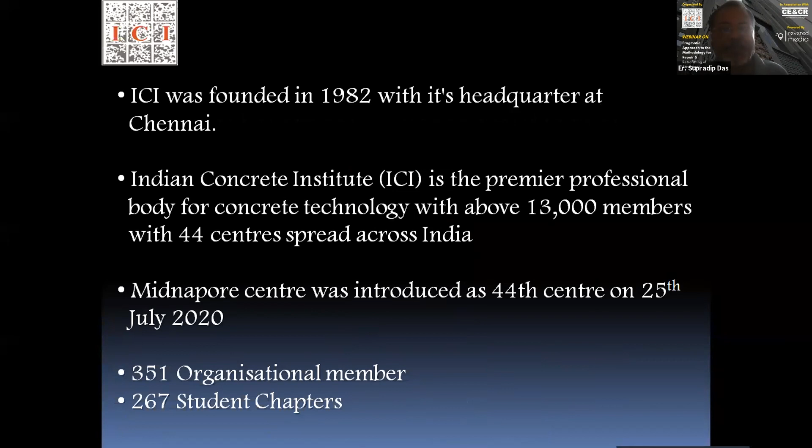So, Indian Concrete Institute is one of the premier professional bodies on cement, concrete and construction technology. We have a new website, www.indianconcreteinstitute.org. As already informed by Rajiv ji, it was founded in 1982 with its headquarters at Chennai. ICI has around 13,000 members at 44 centers spread across India. We have around 351 organizational members and 267 student chapters.

Objectives of ICI are to promote growth of concrete construction and its specialization, to disseminate knowledge and information for needs of changing concepts, to train personnel, collaborate with national and international agencies, create a better understanding between cement and concrete construction technology, to identify R&D issues, outstanding achievement in concrete construction technology through

institutions. We also collaborate with national and international agencies like ACI, Asian Concrete Federation, Singapore Concrete Institute, Concrete Institute of Australia, distribute awards for achievement in concrete construction technology, and arrange lectures on selected topics of relevance to concrete construction. ICI also organizes periodical seminars, conferences, workshops and exhibitions on the subject.

ICI publishes quarterly journals containing peer-reviewed technical papers and technical abstracts from 40 journals. ICI has also brought out a number of publications and monographs on various related topics. Advisory service: ICI offers an industry advisory service for problem solving in design, construction, maintenance, and repair.

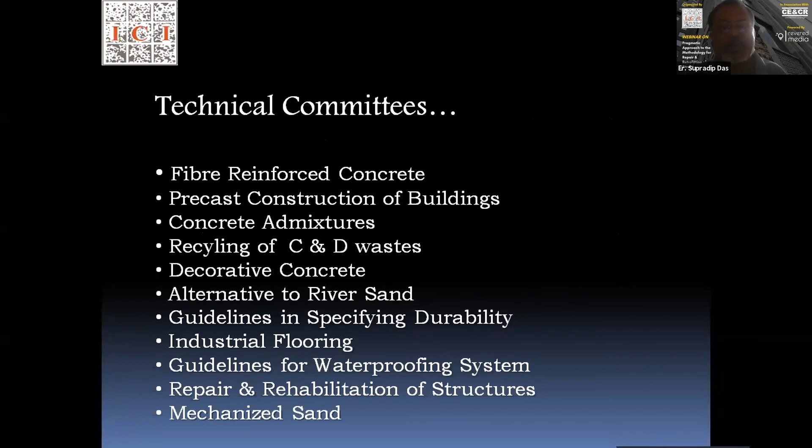We also have around 11 technical committees. They deal with various issues related to cement and concrete, like fiber reinforced concrete, recycling of C&D waste, decorative concrete, river sand, guidelines in specifying durability, industrial flooring, repair and rehabilitation of structures, and mechanized sand. Through these technical committees, we have come out with around 10 technical publications. Their hard copies are available with us. You can download them from our website, or check with the state chairman, secretary, or vice president for a hard copy.

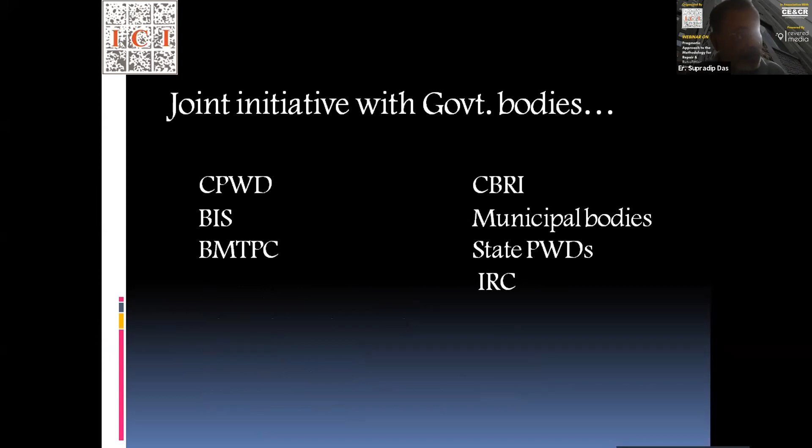We have joint initiatives with government bodies: CPWD, BIS, BMTPC, CBRI, municipal bodies, state PWDs, IRC. We also have headquarter awards, that is annual awards, lifetime achievement awards for each zone, outstanding concrete technologist, innovative application of special concrete, Dr. Ramakrishna award for best project with precast concrete in India, outstanding pre-stressed concrete structure, and young scientist award.

We also have two branded events: ACCon, which is held every 4 years, and IWC, held every 5 years. They are two international events and a unique platform for experts to participate and share their experience and knowledge. In 2020 we were supposed to organize ACCon, but due to the pandemic it has been postponed to 2021, and hopefully in December this year or March next year we will celebrate ACCon 2020.

Concrete Day is a very important event for ICI. It is organized on 7th September every year, and all the centers celebrate. This is the day ICI was formed. Then we have student chapters. Any institution having more than 50 students can have a student chapter. We have around 267 student chapters. Next.

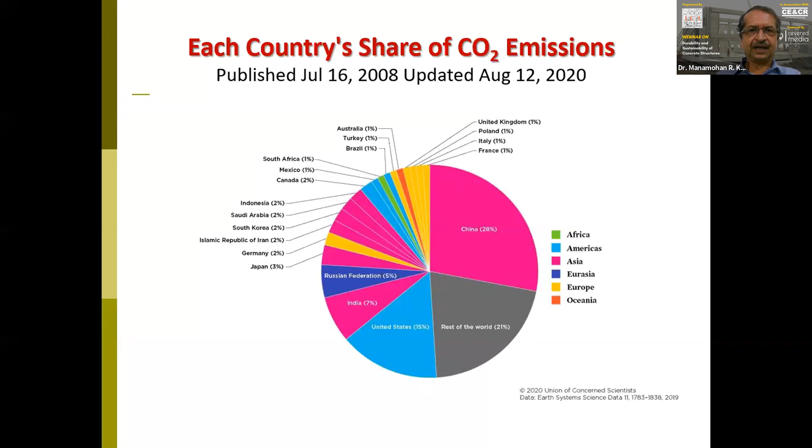Now, everybody is talking about carbon dioxide emissions and the pollution that's being created all over the world. And this is one such pie chart. You will find hundreds of them on the internet. This is updated August 12th, 2020, hence I have chosen this. So you will see here that the majority of the carbon dioxide emissions is from China, followed closely by the United States. And the rest of the world is 21%. But if you look country-wise, after China and the United States, it is India.

Although it's not as alarming as that of China and USA, the picture appears very grim in India because we are planning to have very large growth in the next decade or so. And obviously, along with the development, the carbon dioxide emissions or the pollution potential is likely to go up very high. And hence, we need to be concerned. We are also a part of an agreement to reduce carbon dioxide emissions worldwide. We'll come to that a little later.

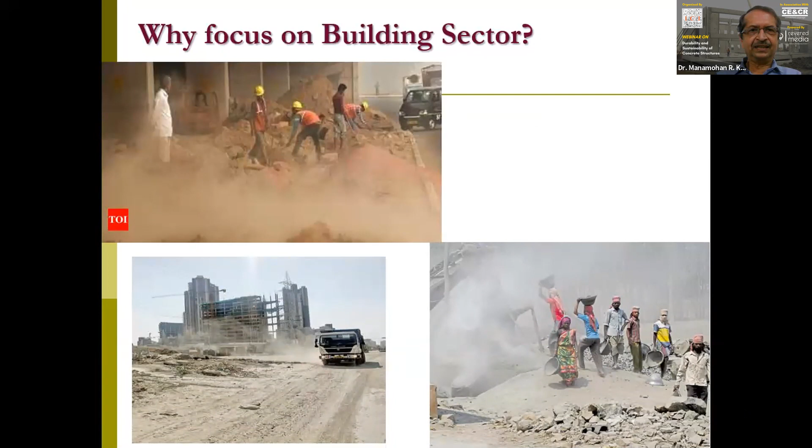So why the building sector? It is obvious; anybody who's been to a building site has seen this kind of environment. Other than the dust that you see around in construction, we also see that the building sector is the single largest contributor to global GHG, with approximately 1/3 of global energy end use taking place within buildings. The construction sector is said to be responsible for more than 1/3 of global resource consumption, including 12% of all freshwater use, and significantly contributes to the generation of solid waste, estimated at about 40% of the total volume.

And hence, building sector is central to any attempt to use resources more efficiently. And hence, the government of India is also seized of this challenge that we are facing in upkeeping the promise that we have made to the world bodies in terms of reduction in pollution.

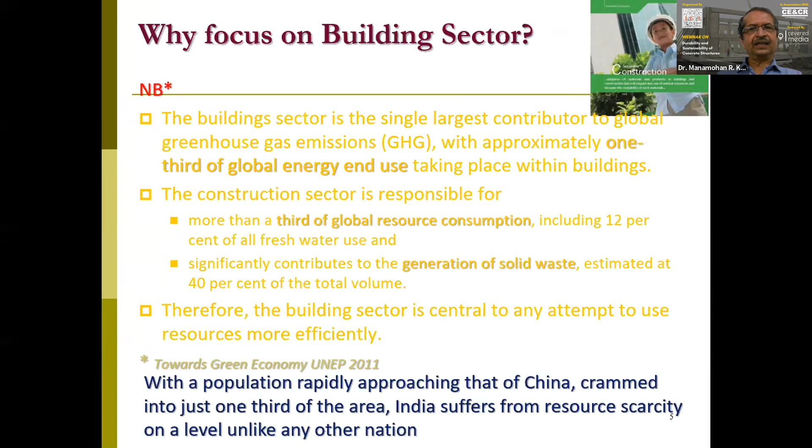So, with a population rapidly approaching that of China, and we are crammed into just 1/3 of that area of China, India then suffers from resource scarcity on a level unlike any other nation. So we should be concerned about the resource depletion as well.

So people talk of green construction, but green construction is not just about building materials only, but there is a lot of it which is connected to the entire conceptualization to construction to maintenance and so on of the buildings and infrastructure. So the general principles of sustainable construction have 4 tenets, which are reducing the energy in use. That is, when the building or the project, this structure is in use, the amount of energy that is consumed, how do we reduce that is one of the primary goals of sustainable construction.

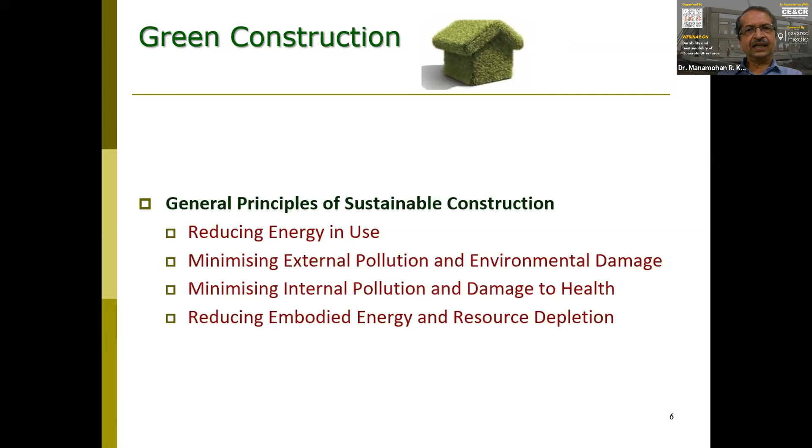Minimizing the external pollution and environmental damage is the next target. The third target is minimizing internal pollution and damage to occupants' health, and also reducing the embodied energy and resources depletion. So we generally as civil engineers right now talk of the first and the last targets that are there. The rest of it, of course, is a matter of how we use the building, how we plan and maintain the building.

So for a building to be sustainable, if you consider the entire life cycle of the building, they consume resources that far exceed the ones associated with the original construction. Yes, we do consume a considerable amount of energy and cause environmental pollution, but if you look at the entire life cycle, the energy that is required in operation and in maintenance is likely to consume a lot of resources.

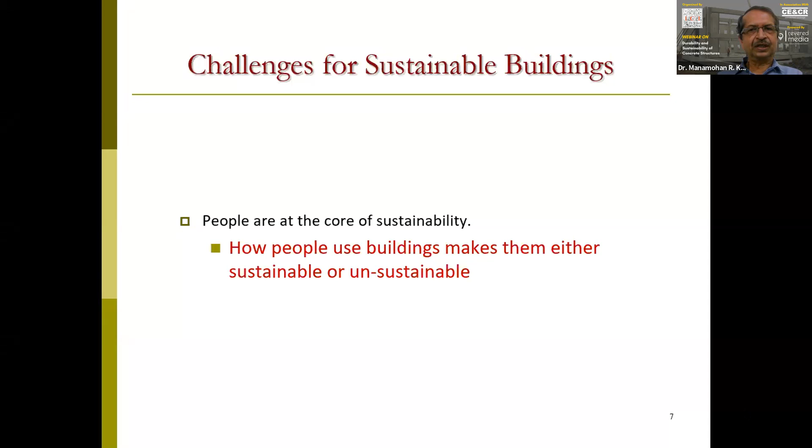And we should remember that people are at the core of sustainability, and how people use these buildings makes them either sustainable or unsustainable. I have seen people who put on their air conditioners and keep their doors and windows open, which means you're trying to cool the entire world, which is against the tenets of sustainability. Hence, it's important to educate people as to how they should use the facilities and appurtenances that are there in their buildings, so that we have a sustainable building to use.

So the challenge is to study the people-focused systems and derive the models and theories that explain and describe these systems, and identify solutions which would reduce any adverse effects of buildings on the environment. This is being tackled jointly by the architects and the engineers together to make sure that the entire impact is much minimal. So the solutions will most likely involve innovative technology for new and improved products and also processes.

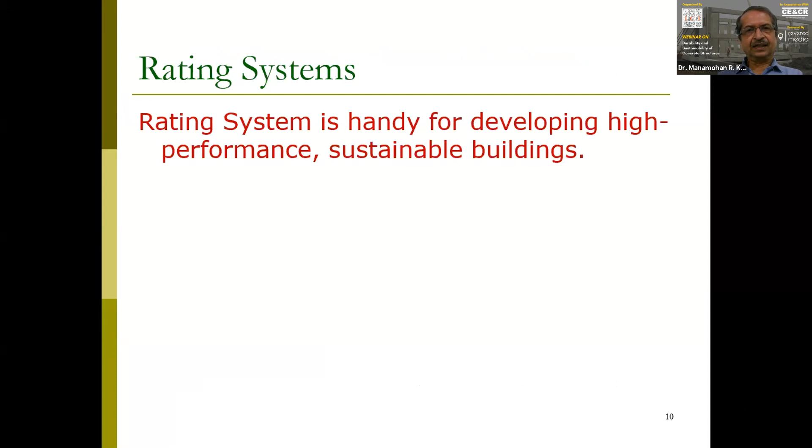There are several rating systems which are becoming popular now. Of course, they are not the ultimate, but at least they become very handy in following certain basic rules and making sure that the buildings are planned, constructed and maintained as per the tenets of sustainable buildings. So the leading ones are the ones from the USGBC or IGBC called the LEED Green Building Rating System. And we also have GRIHA, which is developed by TERI along with the Ministry of New and Renewable Energy, Government of India. There are many more world over, and the basic principles are the same, but they come very handy in at least managing the situation.

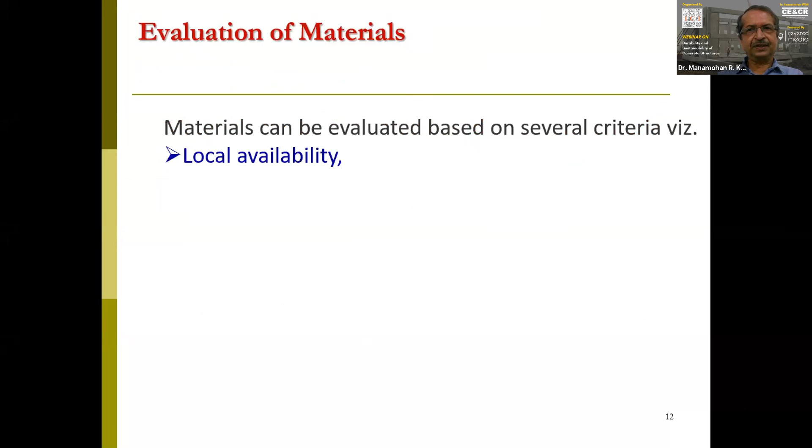Now, when we talk specifically about evaluating materials, there are several aspects that one considers for evaluating the materials that we use in construction. So these are like local availability, embodied energy, percentage of recycled waste materials within that building material, rapid renewability, recyclability, durability, contributions to energy efficiency of buildings, and other environmental impacts.

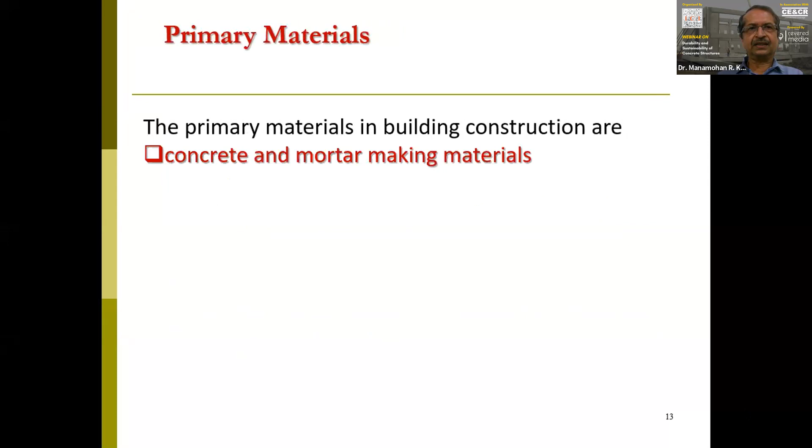So the primary materials that we normally consider in building construction are the concrete and mortar making materials, which consume a very large amount of volume as well as energy. And these can be subdivided into aggregates, fine aggregates or coarse aggregates, and cements. Also, another major part of the building is the walling material, which could consist of clay bricks or concrete blocks, solid or hollow, or presently even AAC blocks.

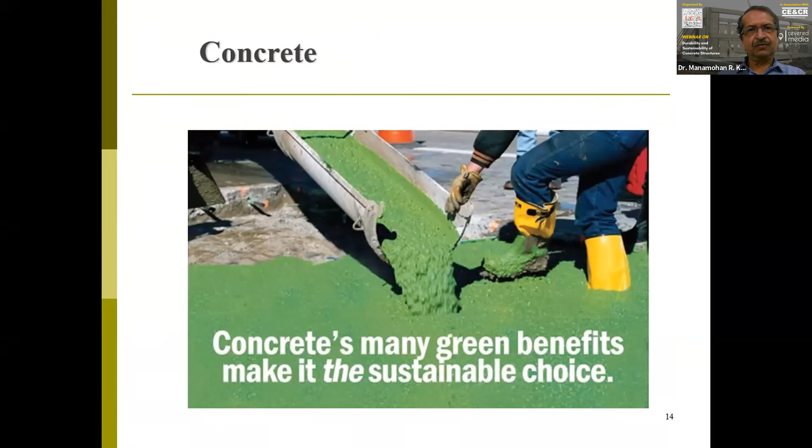Now, coming closer to our topic, which is concrete, it's not the color that you should look at, but the green benefits that we have in using concrete. When you consider the entire life cycle of concrete, it is said to be the sustainable choice for construction. When you look at the entire life cycle, where we consider the extraction, processing, construction, operation, demolition, and recycling of the material that you are using for construction, concrete makes a significant contribution to the triple bottom line of sustainable development.

But then we are not stopping at saying that concrete is the most sustainable amongst what is available; we want to see how to make it more sustainable. So what are the choices that we have? The choices that we have are to make cement more sustainable, because that is the most polluting material within concrete. So how do we try and make cement more sustainable?

It's by using less energy intensive kilns during manufacture, and using supplementary cementitious materials so that we reduce the clinker component or the OPC component, because the saying people normally use, that 1 ton of cement production produces 1 ton of carbon dioxide footprint, is basically for the production of the clinker, that is the OPC.

So if we use supplementary cementitious material, we reduce the clinker content. Suppose you are using fly ash at 35%, you are reducing the clinker content by 35%. And if you are using slag upwards of 50%, you will be reducing the clinker content to less than 50%, so it will be 40% or 45% or whatever. And by using this supplementary cementitious material, you also make sure that you make a better concrete than it would have been with a pure clinker-oriented or OPC cement.

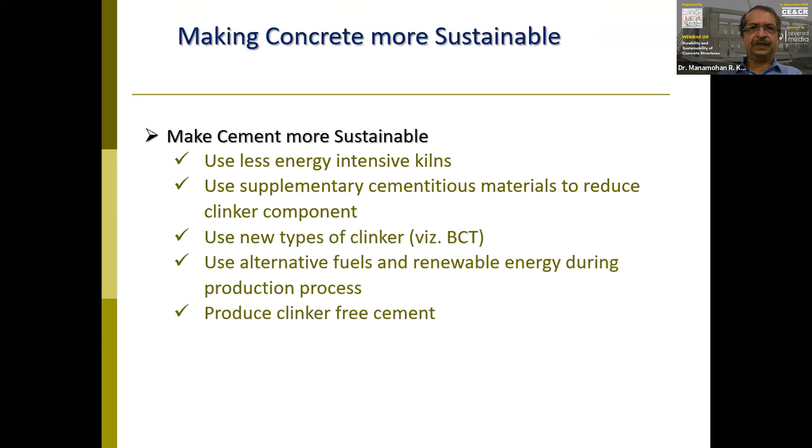We also try to use new types of clinker, and we use alternative fuels and renewable energy during the production process. And we also try to produce clinker-free cement. Now people are talking of geopolymers, which is a very promising material. So that is clinker-free. What I mean by clinker is this OPC clinker. So these could be the alternatives to make the cement more sustainable.

There is also a possibility to make the concrete sustainable with alternative materials. Of course, supplementary cementitious materials are also a part of the alternative materials. But if you look at aggregates, you can use recycled aggregates or secondary aggregates, which is a big topic by itself today. We can use wastes, trying to convert liabilities into assets: wastes as reinforcement, wastes as special additives, and so on.

We can try to make concrete more durable. The longer the building lasts, the lesser is the demand on reconstruction or rebuilding, and again resource depletion, pollution, and so on. So durability happens to be a subset of sustainability. That's why I thought it better to deal with durability as a subset of sustainability and focus more on sustainability. So these are some of the alternatives to make the concrete more sustainable.

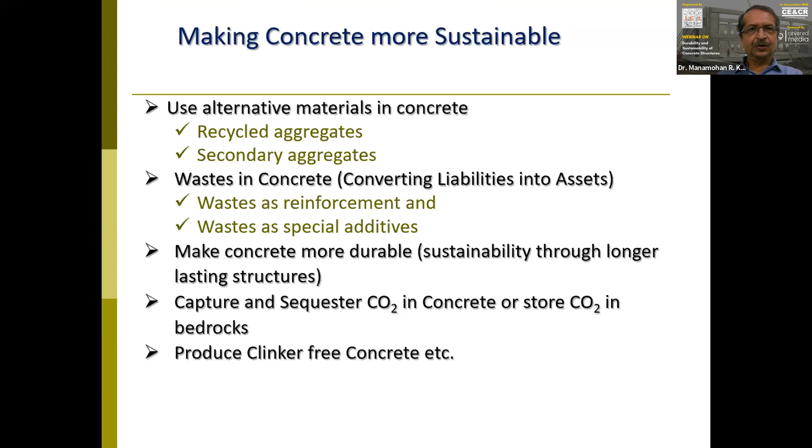In addition to that, efforts are now on to capture carbon dioxide in cement manufacture or any other industry, and sequester it in the concrete, or sequester the carbon dioxide in the bedrocks and so on. There is also effort to produce clinker-free concrete, like geopolymer concrete. There are two terms, geopolymer cement and geopolymer concrete, so this appears in both places.

So if we are planning to use any alternate material, we have to go systematically, analyze, and find out what benefits accrue from the use of these alternate sources. That involves the characterization of materials. Any material that you choose as an alternative to present conventional materials of concrete, you have to subject to physical and chemical characterization, and also study concrete made with these alternative materials, in the fresh state and hardened state, to see what the benefits are, what the difficulties are, what the challenges are, how to overcome them, and so on.

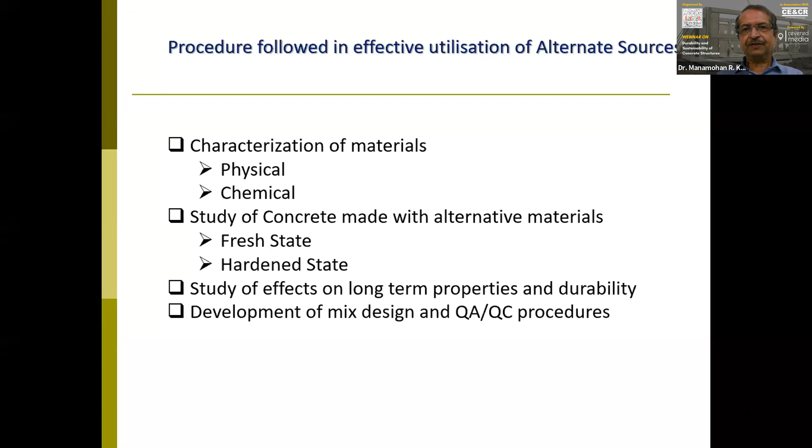And the third thing is to study the effects of this concrete with alternative materials on the long-term properties and durability. So again, durability becomes a parameter for consideration here also. And once you approve and select materials, you also have to give the field the appropriate mix design and QA/QC procedures, which might be different from what people are accustomed to with conventional materials.

Now, if you look at cement and how to reduce carbon dioxide by more than 1 billion tons per year by 2050, which is a target that cement companies have set for themselves, there are several groups who are working to see how this can be achieved.

Now, there is an association called Global Cement and Concrete Association, which all of you must have heard. This is a consortium of 40 of the world's leading cement and concrete companies.

And from 2020, they have started their efforts to make sure that we achieve our goals for reducing the carbon dioxide footprint. So the ambition statement that they have released demonstrates the commitment of the industry across the globe to drive down the carbon dioxide footprint of concrete, which is the world's most used man-made product, with an aspiration to deliver society with carbon neutral concrete by 2050. Carbon neutral concrete by 2050.

So the statement which GCCA has released identifies the essential levers that will be required to achieve carbon neutral concrete, including reducing and eliminating energy-related emissions, reducing process emissions through new technologies, and deployment of carbon capture, more efficient use of concrete, reuse and recycling of concrete and buildings, and harnessing concrete's ability to absorb and store carbon from the atmosphere. The concrete itself acting as a carbon sink.

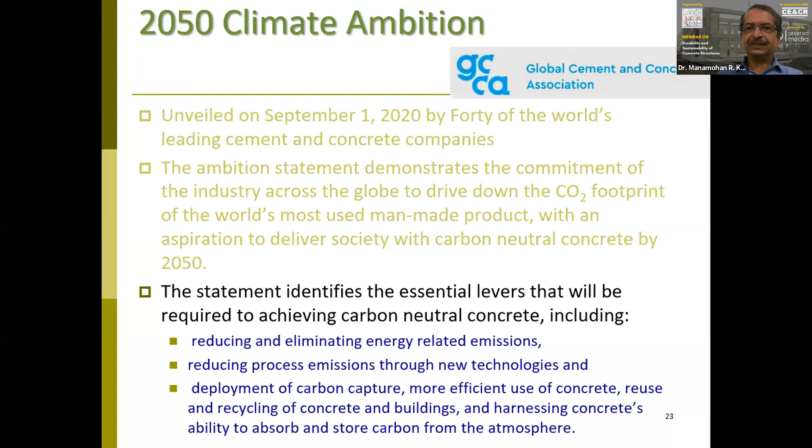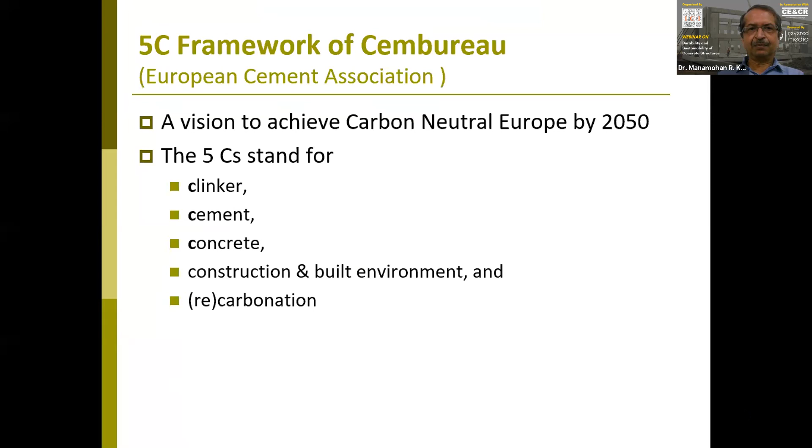There is also another effort in Europe, which is from the CEMBureau, the European Cement Association. They have been working with the same vision to achieve a carbon neutral Europe by 2050. They have put themselves what is called the 5C framework, which is clinker, cement, concrete, construction and built environment, and recarbonation. So these are the 5 C's that they are planning about.

So they are hoping that from the 2017 emission levels, they can reduce the kg carbon dioxide per ton of cement from 667 kgs to 227 kgs of carbon dioxide per ton of cement by optimizing various aspects, that is decarbonated raw materials, biomass, thermal efficiency, new cements, and then the fuel and electrification effects, and also try to access the various innovations which are in the pipeline right now, and also access renewable electricity, high carbon dioxide price parity that is likely to come in the future, and so on. So this is the first C that they are tackling.

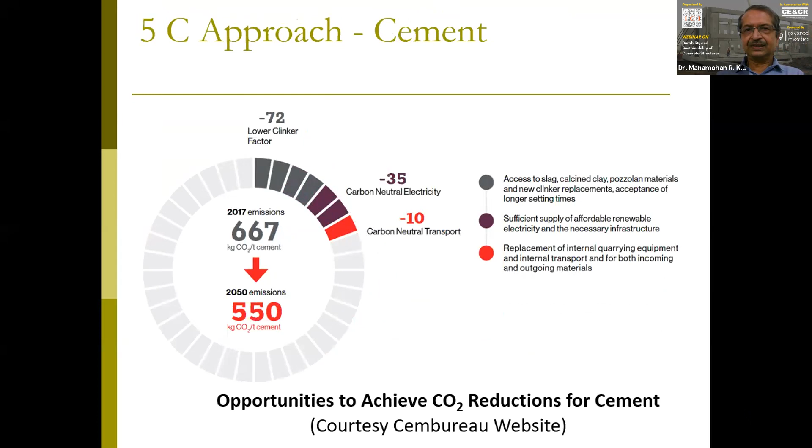The second C, about cement, they want to reduce from 667 to 550 by looking at lower clinker factor, carbon neutral electricity, and carbon neutral transport. And in concrete, they want to look at improved concrete mix design, carbon neutral transport again, and reduce the kg of carbon dioxide per ton of cement from 667 to 608.

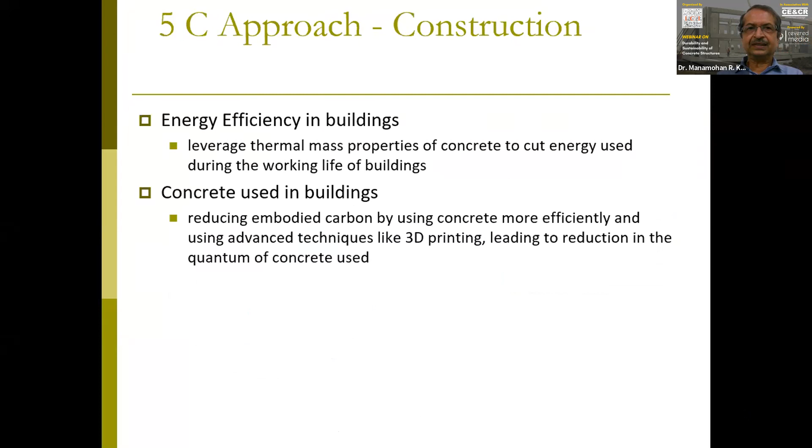Then construction, where they are looking at leveraging thermal mass properties to cut energy used during the service life of the buildings, and the reduction in the embodied carbon in the concrete used in the buildings by using advanced techniques like 3D printing, leading to reduction in the quantum of concrete used itself, and also using concrete structures' adaptability for mixed use in buildings,

as well as design for deconstruction. This design for deconstruction is an interesting phenomenon where a building is conceived at the origin itself with the objective to disassemble at the end of life. This approach will allow materials and components to be removed easily and reused to construct new buildings, which means we are planning for disassembly as well as adaptability for mixed use as a method for reducing the carbon footprint.

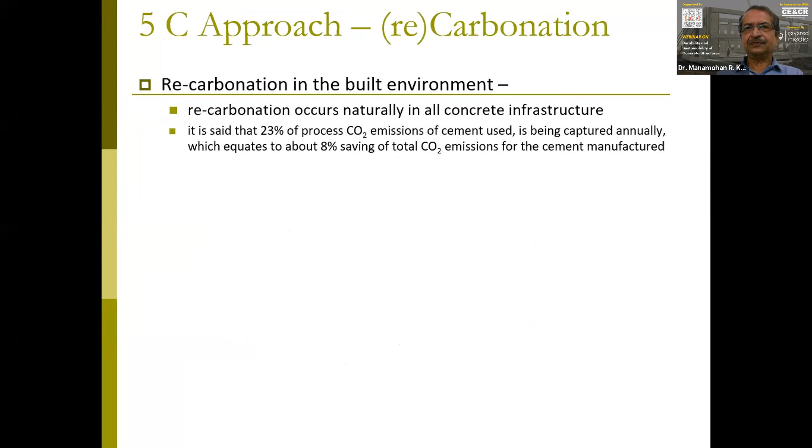And recarbonation is basically using a natural phenomenon where concrete has a tendency to absorb carbon dioxide from the atmosphere. So it is said that 23% of carbon dioxide emissions of cement used is being captured annually, which means about 8% of savings of carbon dioxide is automatically happening. So this they want to consider, and enhanced recarbonation of recycled concrete.

That is, when you are breaking the concrete for utilization again as a recycled material, they want to accelerate the absorption of carbon dioxide by these recycled materials by pumping in exhaust gases from the cement kiln or any other captured carbon, so that 50% of carbon dioxide can be absorbed. The more you break them down, the greater the capacity to get carbonated by absorbing carbon dioxide. So these are the efforts that they are looking at.

And also they are looking at using natural minerals to recarbonate by exposing them to air and kiln exhaust gases and using that as clinker substitutes. So the overall effect of this 5C is to bring down 783 kgs of carbon dioxide per ton, which was the value at 1990 levels. It is not 1 ton of carbon dioxide for 1 ton of cement.

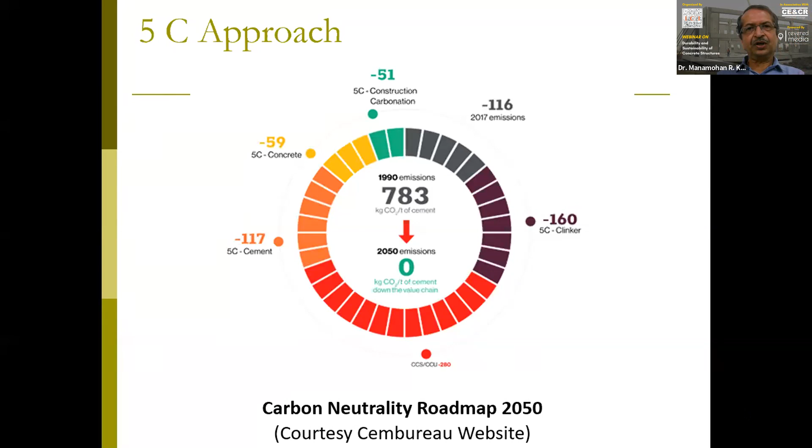It had already come down to 0.78 tons. From that 0.78 tons, by 2050, they want to bring it to 0. So this is the roadmap, that carbon neutrality roadmap that people are working on. Of course, GCCA or Cembureau, whoever it is, there is a roadmap on which people are working. They are modifying this. A lot of surveys are being considered. A lot of engagement with the government is going on in various countries to make sure that concrete becomes carbon neutral.

So worldwide, several hundreds of companies and research groups are working to keep carbon dioxide out of the atmosphere and store it someplace else, including deep geological formations, as I mentioned, in bedrocks, soils, soda bubbles, and concrete blocks, and so on. And by making waste carbon dioxide into something marketable, entrepreneurs can now begin raising revenues needed to scale their technologies.

There's an interesting competition organized by NRG and COSIA Carbon. This is called the Carbon XPRIZE, and this is a challenge where $20 million is the prize for giving the technology which is the best as far as carbon dioxide reduction is concerned. So this year the winners were two.

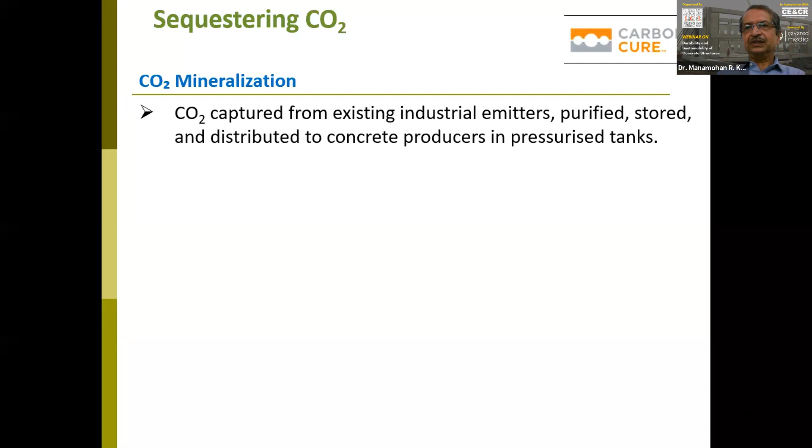CarbonCure is one company which has already successfully implemented carbon dioxide mineralization. That is, carbon dioxide captured from industrial emitters is purified and delivered in pressurized stainless steel tanks to the RMC producers. And the liquid carbon dioxide is injected into the wet concrete mix at the time of manufacture of the concrete itself. You can see the cylinder there, introduced in one of the RMCs.

And this carbon dioxide in the fresh state of concrete reacts with the calcium ions from cement to form nano-sized minerals of calcium carbonate, which get embedded in the concrete, which results in stronger concrete and mix optimization, giving you a reduction in cement consumption, and also the consumption of carbon dioxide. So the technology can be retrofitted into an existing concrete plant. That's the advantage of this prize-winning technology by the company called CarbonCure.

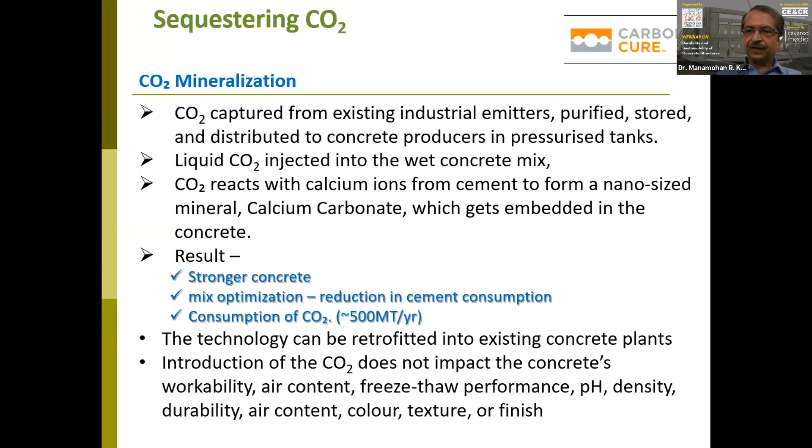And the introduction of carbon dioxide does not impact the concrete's workability, air content, freeze-thaw performance, or pH, because that's a question that everybody raises, that if calcium carbonate is being formed, pH is going to reduce. No, the mechanism is different. And durability, air content, color, texture, or finish, none of them get affected, but you get a lot of benefits.

The other prize winner in that contest was from the University of California, Los Angeles, led by an Indian, Gaurav Sant, and they have come out with what is known as CarbonBuilt as a company now. Their process locks the flue gas carbon dioxide into limestone with what they call CO2 concrete. This requires very minimal capex, a simple stack tap integration with limited site utility tie-ins. It does not require any carbon capture system, and readily integrates into the existing construction supply chain.

Basically, it's very useful for precast applications, and it's already successfully implemented in some plants which are manufacturing concrete blocks and so on. These mixtures can incorporate low-value fly ashes, which is a great advantage, including those reclaimed from landfills and pond ash and so on, without compromising on the engineering performance of the equivalent concrete.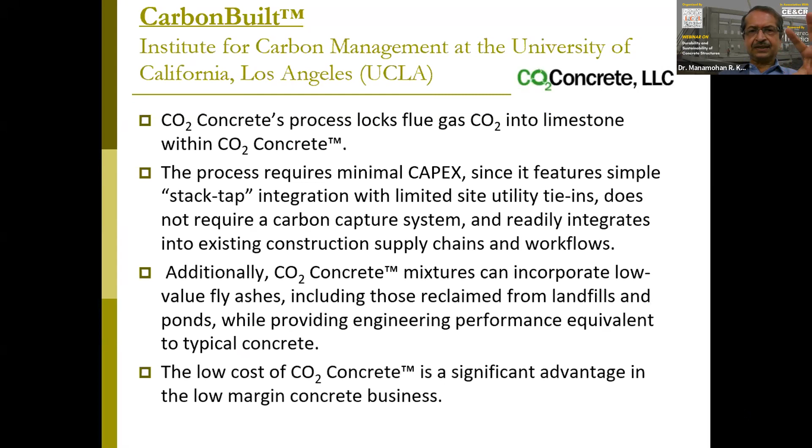So this is a significant advantage with this particular method, which they are now calling CarbonBuilt's Reversa technology. This is the technology that is likely to become very popular, along with, of course, CarbonCure, which is also a technology that is likely to grow very fast even within our country. This modular technology can be added to any site to permanently embed flue gas carbon dioxide into masonry or precast concrete produced nearby.

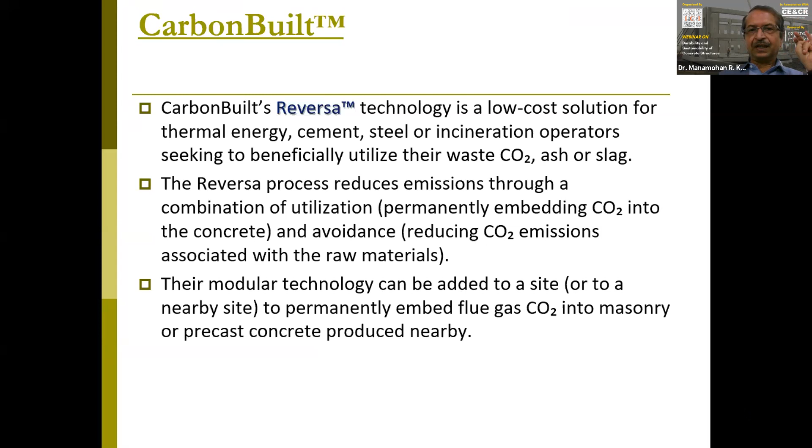Okay, there are a few projects I just want to quickly go through. There is a Swedish project which includes studies of calcination and clinker mineral formation for carbonate-based raw materials. All of them are looking at something allied to this particular issue. They're using electrical heating as one of the technologies, carbonation under cooling in high carbon dioxide concentrations, evaluation of technologies aiming at upscaling, and determination of gas composition of CO2-rich process gases. So the suitability of these gases for transport and geological storage will be evaluated. This is just a project which has started.

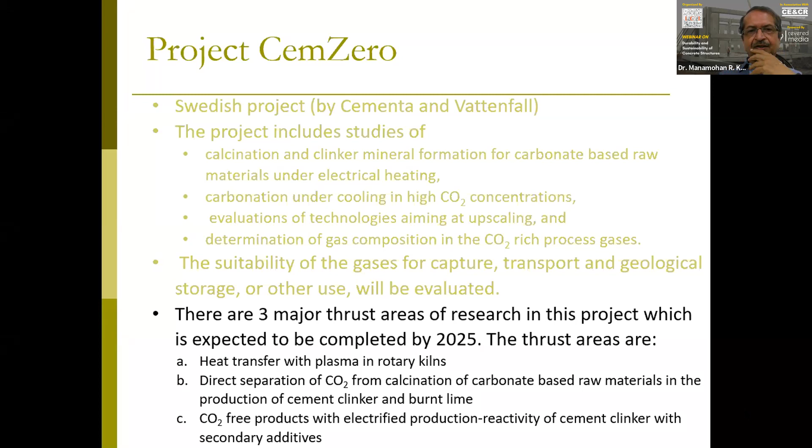And there are 3 thrust areas that they are looking to finish by 2025, where they are talking about heat transfer with plasma in rotary kilns, direct separation of carbon dioxide from calcination of carbonate-based raw materials, and carbon dioxide-free products with electrified production, reactivity, cement, clinker, and so on.

They are also talking about nanomaterials derived from the use of carbon dioxide. This is from a company called Carbon Upcycling, which transforms residues such as fly ash and slag, making them more reactive and increasing their cementitious properties. So the use of carbon dioxide previously captured is an addition to the cement, which allows the production of concrete with low impact footprint. So I'll rush through now.

There is a technology by Solidia, which is a low-lime calcium silicate cement, which cures by reaction with gaseous carbon dioxide. This is another technology that they have been trying to push for several years now. There are some issues. So this is one more technology where carbon dioxide is used in the curing process and captured within CSC-based concrete. So there are several such.

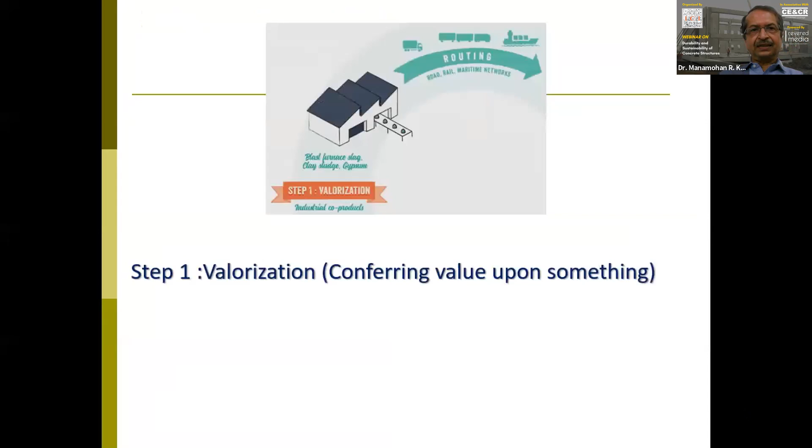This is one from Hoffmann Green. This is more akin to geopolymer. Basically, there are steps called valorization, where we are adding value: recover and enhance co-products from industry, which are sent to the production plant, like blast furnace slag or fly ash, calcined clay, and so on and so forth.

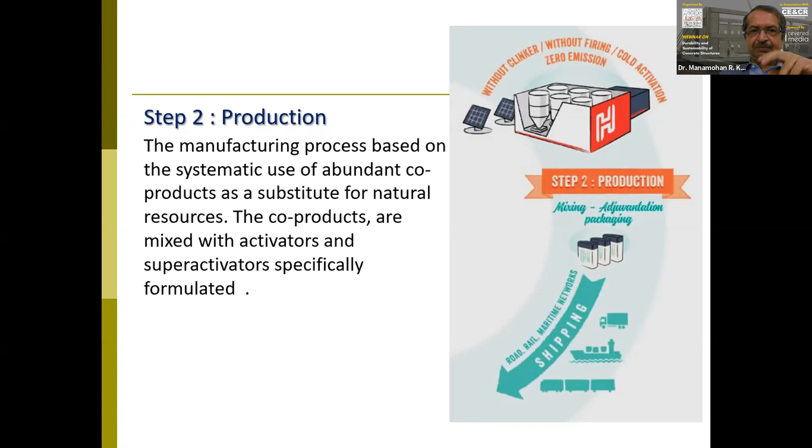The manufacturing process basically involves systematic use of these co-products in the production of the cementitious material using the activators. All those who know about geopolymer know about the role of activators. This is followed by the packing of cements, bag or bulk, and sent to the construction site. At the construction site, these cements are used to serve the 3 main cement markets, like precast concrete, ready-mix concrete, or even retail sale.

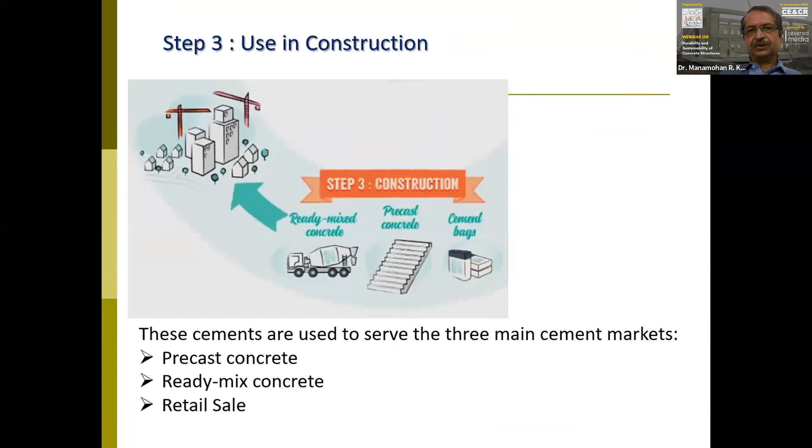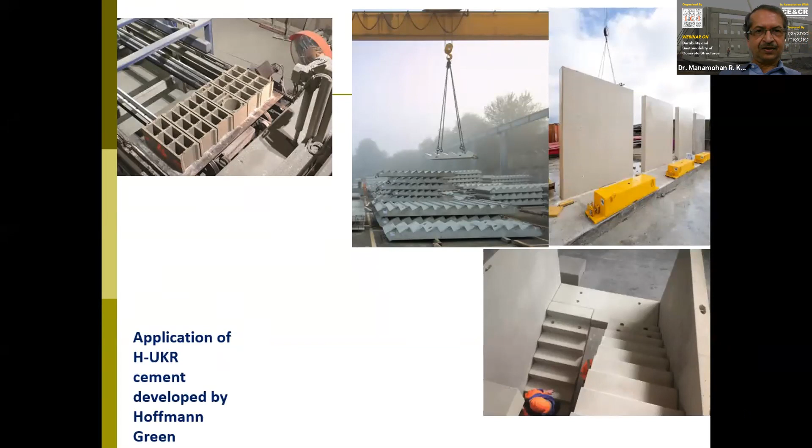So this company has tried to produce different types of cement, which have given very promising properties, and I'll just rush through. These are some of the products produced by this company. You can see that they are all precast oriented, but precast being the most favored technology now, this has a big role to play there. This is a non-clinker kind of application.

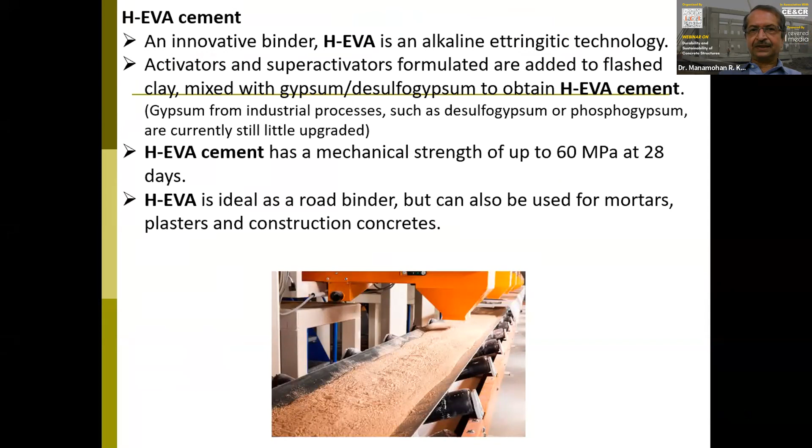They also have activators and super activators that they have formulated to create what is known as H-EVA cement, and this cement has a mechanical strength claimed by the company as 60 MPa at 28 days. So this is an ideal road binder, but can also be used for mortars, plaster, and construction of concretes. Virtually no carbon dioxide footprint is there. So people are talking of zero cement concrete.

This is again from Australia, and this is for concrete corrosion avoidance in sewage systems by using this particular cement, which is a composite of nanosilica, fly ash, slag, and hydrated lime. They are saying that it can reduce concrete corrosion by 96% and totally eliminates residual lime that is instrumental in the formation of fatbergs, which are very common in sewage systems.

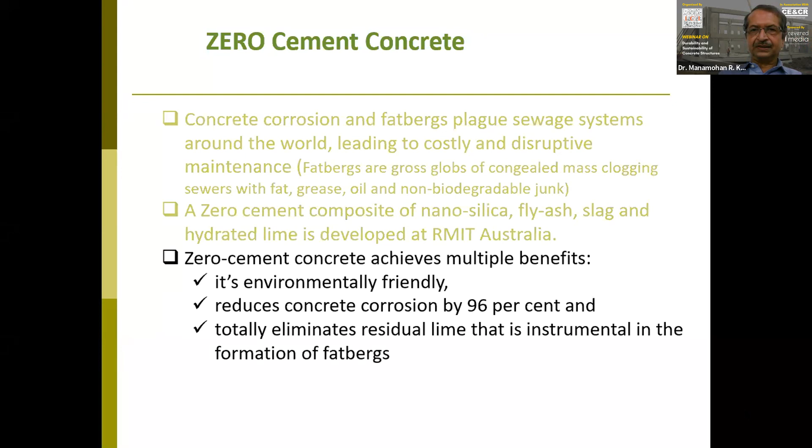LC3, of course, we have an authority on LC3 here on the panel, Professor Manu Santhanam. This is limestone calcined clay cement, which is going to become a reality very soon because the draft code for LC3 is already in circulation. This was initiated by EPFL of Switzerland and the Indian Institutes of Technology, IIT Madras, IIT Delhi, along with TARA. They have interacted with several cement companies, and clay has been successfully calcined and used in production of LC3 or even LC2.

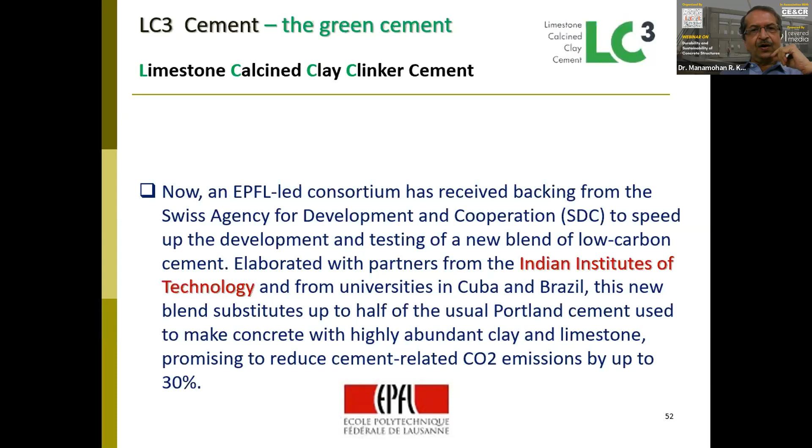The process basically consists of finding suitable clay, processing the clay, calcining the clay, and then you can make either LC2 or LC3. If you blend the clinker with the calcined clay and limestone, what you get is LC3. If you blend only calcined clay and limestone and keep it as a powder, it's called LC2, which later you can blend with OPC and use in concrete.

The greatest attraction is that clay having very low kaolinite content of maybe 40 or 45%, which is not suitable for other industries like ceramic, paper, etc., and is now lying stockpiled in various places, can be fruitfully used. Plenty of such inferior clays are available across the country. So this is another application people are going to look at, because BIS has come out with the draft code, and once it is approved, you can legally use this.

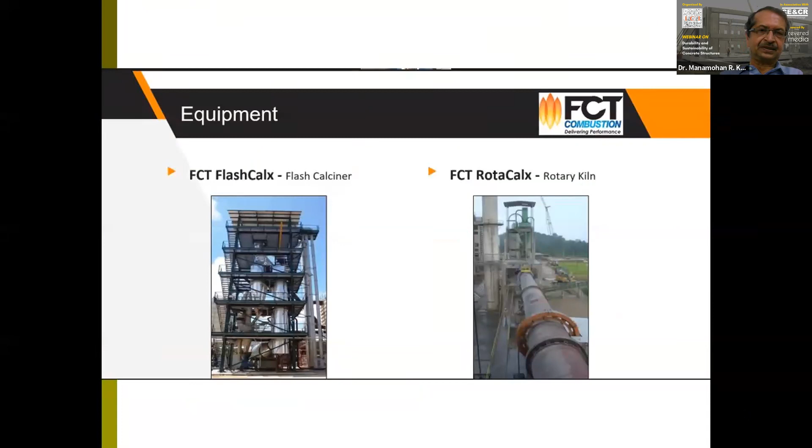This calcination can be using a flash calciner or a rotary kiln. That depends on several pros and cons the cement company can look at and add on as part of its production facility at various plant locations. There are a lot of advantages. The production capacity for cement can be increased twofold without increasing total carbon dioxide emission. Quarry life can be extended, costly carbon capture storage technologies can be avoided, and emissions of LC3 are estimated to be 20 to 30% lower than Portland cement.

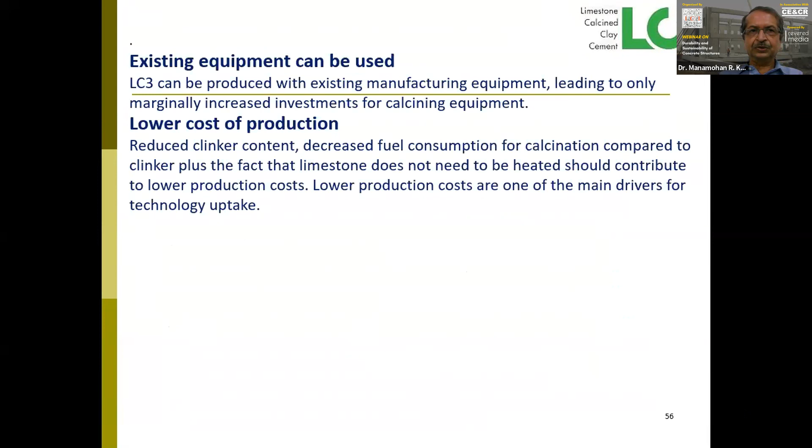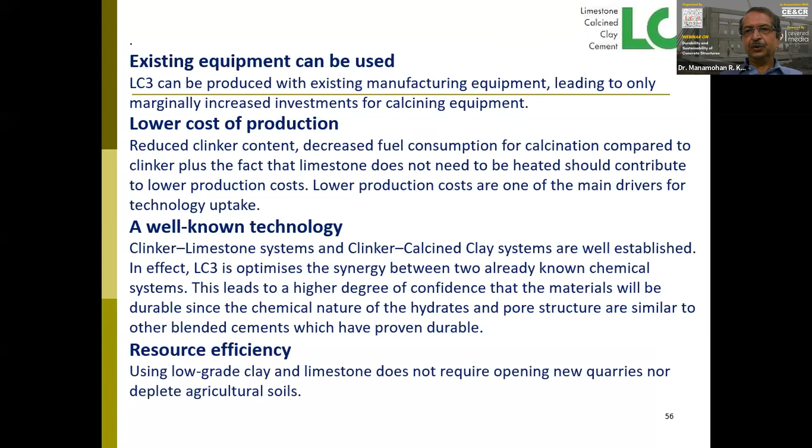So the other advantages are that the existing system equipment can be used, the cost of production is lower, and it is a well-known technology because clinker limestone systems and clinker clay systems are very well established. And using low-grade clay and limestone will not require any opening of new quarries or deplete the agricultural soils.

So lastly, on this sustainability, people are also talking of protecting concrete by using carbon upcycling technologies, which is by this company called Carbon Upcycling, which has introduced a nanotech coating called alpha carbon, which protects the materials like concrete against acid and corrosion.

So it's an effort to convert carbon dioxide into a range of solid nanoparticles useful to all other manner of materials. So the alpha carbon coating is installed already, according to the company's claim, in over 250 locations across US, including franchises of McDonald's, Costco, etc.

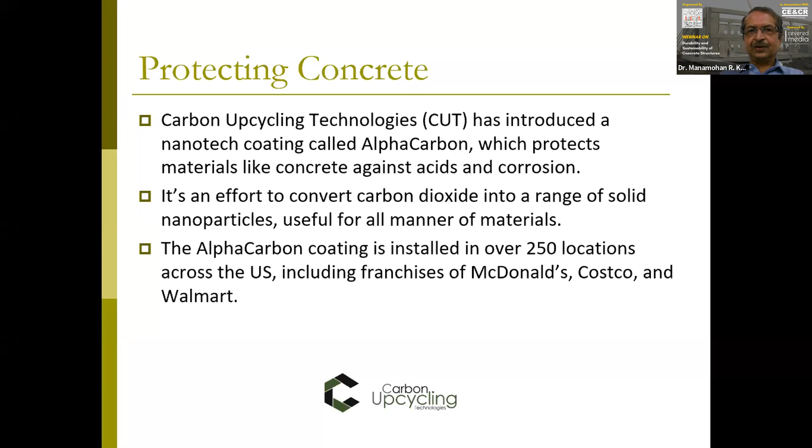So the use of these materials, from sustainability point of view, in the Indian context, we have to consider the following points. Concrete construction practices are significantly different here compared to developed countries. Even now, the majority of concrete produced and used in India is by the unorganized sector, who have no clue as to what sustainability is all about, and there are no systems and procedures in place, virtually no awareness about sustainability aspects, no environmental regulations.

Even if there are environmental regulations, they are inadequate or not enforced effectively. The engineered or semi-engineered constructions are very limited, or they are limited to larger housing or infrastructure projects. The use of ready mix, where there is a likelihood of optimal use of materials, is just about 10% of the total concrete produced. These are the challenges now from Indian context in bringing sustainability concepts into this country and make sure that we become carbon neutral by 2050.

So there is a need to minimize wastage of precious material resources by making efficient and judicious use. This has to be concentrated upon.

Now, quickly, a few slides on durability of concrete, which is also a subset, as I said, of making concrete sustainable. So we need to understand to a great extent the efforts are on to make the concrete strong, but there should also be effort to make the concrete dense and capable of withstanding the actions that are likely to reduce the lifespan of concrete.

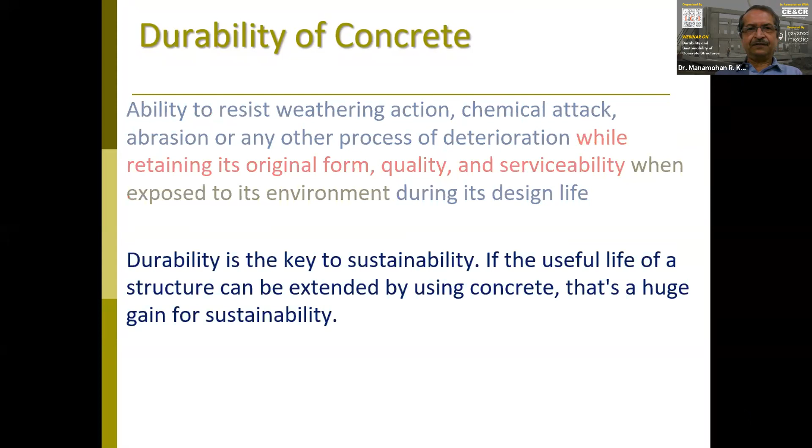So durability generally is defined as the ability to resist weathering action, chemical attack, abrasion, or any other process of deterioration, while retaining its original form, quality, serviceability, etc., when exposed to the environment for which it is designed during its design life. So this is a kind of all-encompassing definition for what we are looking at in durability. So this is, as I said, the key to sustainability. And if useful life of a structure can be extended by using concrete, that's a huge gain for sustainability.

So there are two things to look at: the concrete system, which basically consists of materials and processing, and the service environment. That is, what are the physical effects on the concrete structure or structural component, and what are the chemical effects that are there. So there are basically efforts now to look at this as the target.

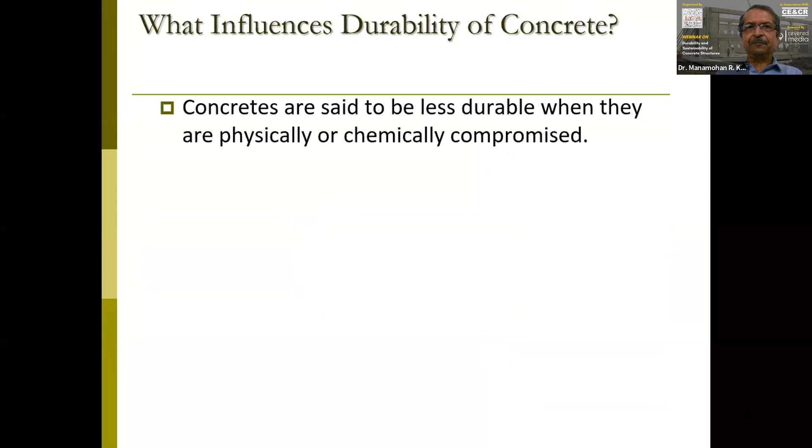So the concretes are said to be less durable when they are physically or chemically compromised. Now, physical factors can result in chemical reactions, reducing the durability. For example, cracking due to shrinkage, which is a physical factor, can allow reactive gases and liquids to enter the concrete and chemically alter and spoil the system there.

Similarly, chemical factors can result in physical outcomes, reducing durability, like alkali silica reaction, opening up cracks which are physical, allowing other agents like sulfate and chlorides, etc., or carbon dioxide to enter. So physical factors and chemical factors both are things that we need to look at.

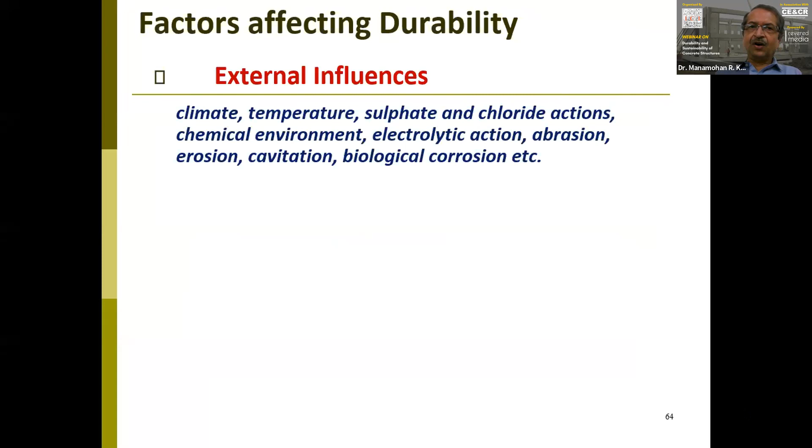For example, the external influences for reducing the life of concrete are climate, temperature, sulfate and chloride actions, chemical environment in which the structure or structural component is likely to be, electrolytic action, abrasion, erosion, cavitation, biological corrosion, etc. These are all external influences which will reduce the lifespan of concrete.

And internal influences are those which are, what we call, inborn, or diseases which are born with the baby, like the type of cement and aggregates, level of chemicals in ingredients, alkali aggregate reaction which can come a little later due to imperfect materials, water cement ratio which might create havoc, cement content, volume changes, permeability, etc. So many issues are there.

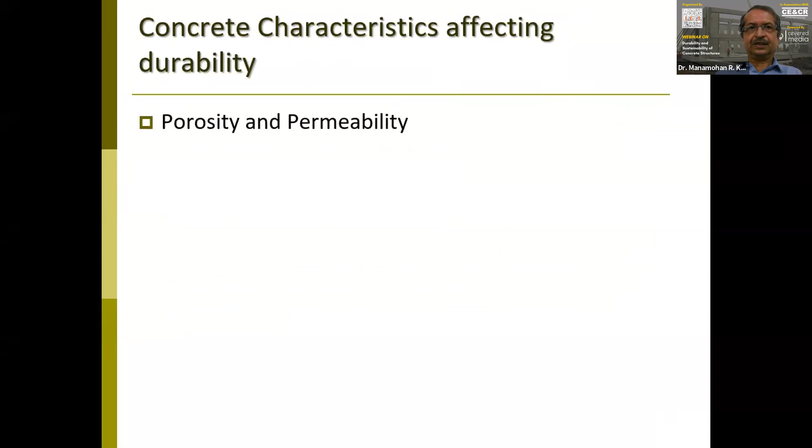Now, what are these things? Let us look at that. What are those which will affect the durability? One is the porosity and permeability of concrete, the mix characteristics, that is water cement ratio and presence of admixtures. Thirdly, the type of cement and aggregate that are used, presence or otherwise of cracks, thickness and quality of cover. These are main things that we should look at.

Of course, there are a lot of transport mechanisms. I wouldn't want to get into great detail, although there are many slides on this. I would like to rush through and probably have more discussion with the esteemed panel to understand the implications. So what is important in transport mechanism is that we are looking at the aggressive elements getting into the concrete and spoiling the concrete or reducing the life of concrete, especially reinforced concrete.

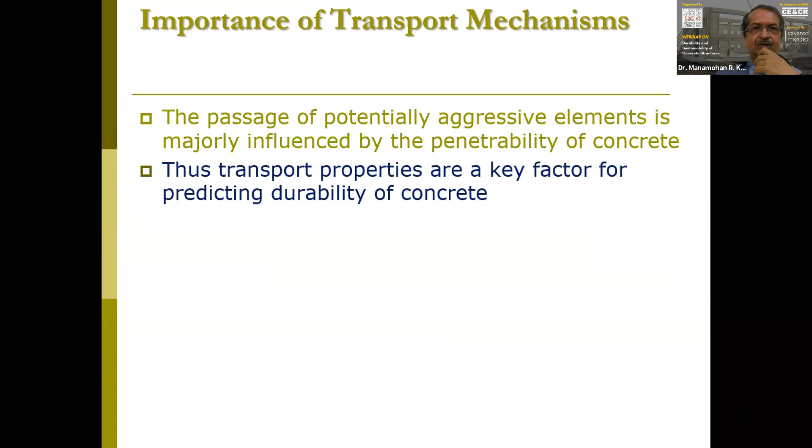So the passage of potentially aggressive elements is influenced by the penetrability of concrete. Now, how do we alter the penetrability of concrete? Number one, make it as dense as possible. Make sure that there are no capillaries or the capillaries are discontinuous and the pores are not connected to each other and there are no chemical actions inside. So all of these are connected to the availability of transport for the external elements to get in. So transport properties are a key factor for predicting the durability of concrete.

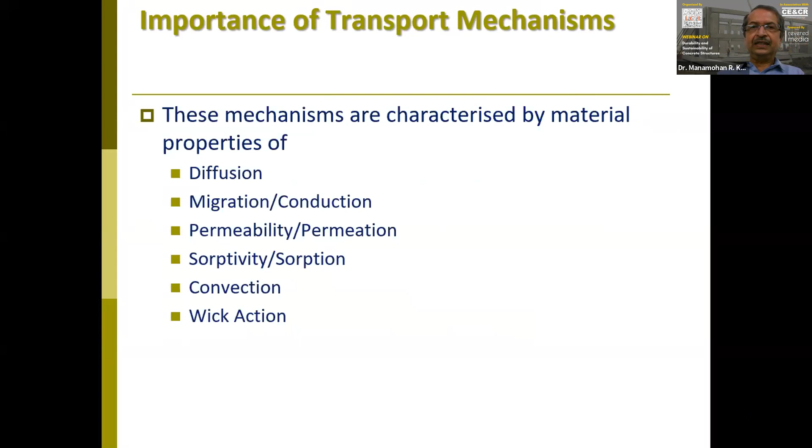So the movement of fluid and ions includes the mechanism of capillary action, fluid flow under pressure, flow under concentration gradient, and movement due to applied electrical field. So these mechanisms are characterized by the material properties of diffusion, migration, permeability, sorptivity, convection, wick action, and so forth. So these are terminologies that one should understand to gauge the possibility of these external elements getting into the interiors of the concrete and hence affect the durability.

So diffusion is movement of gases or molecules under the influence of concentration gradient from an area of high concentration to one with a low concentration. And gaseous diffusion is experienced in unsaturated concrete, while ionic diffusion occurs in saturated and partially saturated conditions. There are equations and methods to evaluate that; I'm not getting into that. It acts as a predominant mechanism for concrete structures fully submerged in seawater or salt contaminated soil. In combination with other mechanisms, it contributes to the chloride transport in concrete under most exposure conditions.

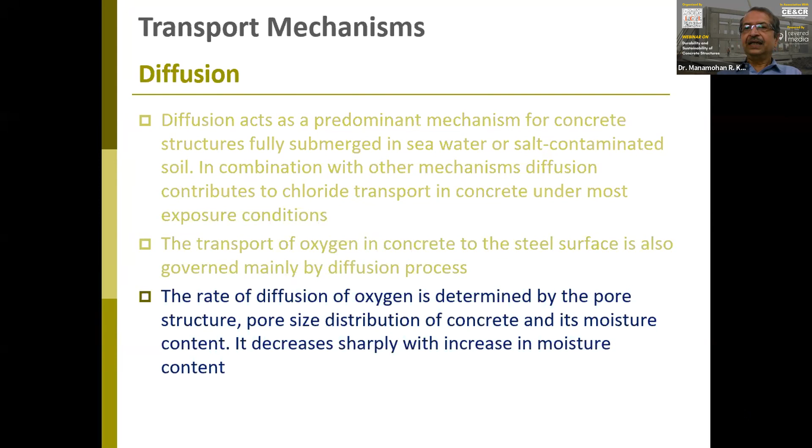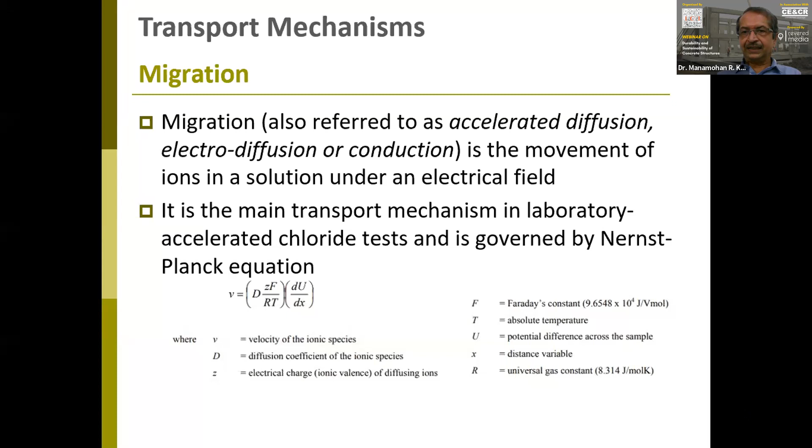So the transport of oxygen in concrete to the steel surface is also governed by the diffusion process. The rate of diffusion is determined by the pore structure, pore size distribution, and its moisture content. So it decreases sharply with the increase in the moisture content. And when you talk of migration, which is also called accelerated diffusion or electrodiffusion or conduction, this is the movement of ions in a solution under an electrical field. So it's a main transport mechanism in laboratory accelerated chloride tests, and they are governed by this particular equation.

Permeation or permeability of concrete is defined as a measure of capacity of concrete to transfer fluids through its pore structure under externally applied pressure. That's very important, that when we talk of permeability, we talk of an externally applied pressure under which this fluid transfer takes place, while the pores are saturated with that particular fluid. The driving force for liquids and gases through the pore spaces or crack network is a pressure gradient. Permeation plays an important role in water retaining structures where water transport through the structure is detrimental. And for permeation, Darcy's law is used.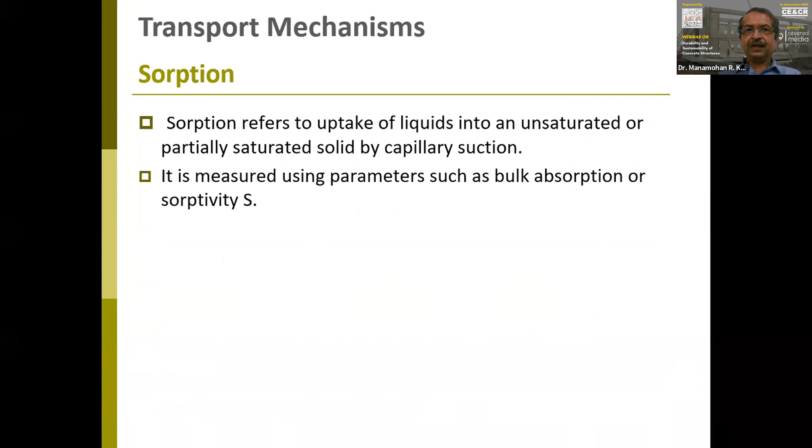And sorption refers to the uptake of liquids into an unsaturated or partially saturated solid by capillary suction. So this is another mode by which the ingress can happen. It is measured using parameters like bulk absorption or sorptivity. Again, there are equations for this. So sorptivity is influenced by larger capillaries and their degree of continuity, and it is very sensitive to hydration of the outer concrete surface and hence the curing. So it's influenced by compaction, curing, the aggregate orientation and distribution, as well as by mix composition.

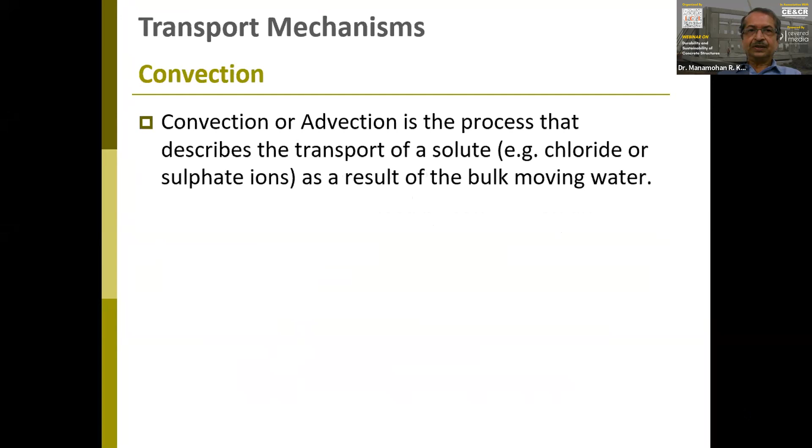Convection or advection is one word used. It's a process that describes the transport of the solute, like chlorides or sulfate ions, as a result of bulk moving water. So convection along with diffusion is the main transport mechanism for chloride ingress in cracked concrete, and it also has an important role in the movement of chloride ions when concrete is exposed to alternate drying-wetting conditions. So again, there is an equation to assess this.

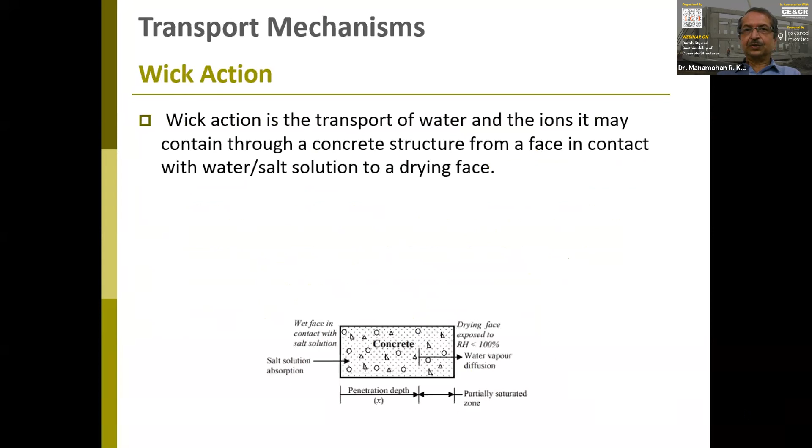And there is also this wick action, which is a transport of water and ions through the structure from the face in contact with water to a drying face. So there are combined transport processes that will be there. It's not that there is only one type. There are several paths that will be there, several effects that will be there.

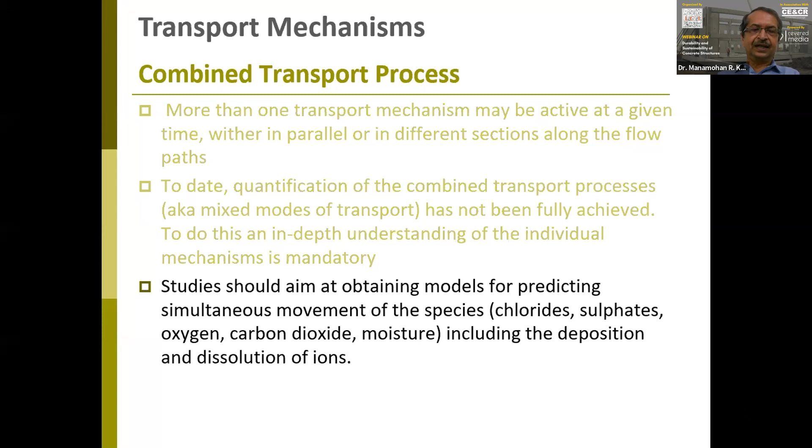So to quantify the combined transport processes, also called mixed modes of transport, has not been fully achieved. You are not able to isolate, aggregate, and see the combined effect. So to do this, an in-depth understanding of individual mechanisms is mandatory, and studies should aim at obtaining models for predicting simultaneous movement of chlorides, sulfates, oxygen, carbon dioxide, moisture, because it's very difficult to see what is the impact of one over the other and their combined movement on the durability.

So concrete structures, from our side, require excellent handling of concrete to make sure that the materials are ideal, the gradation of all the materials is perfect so that the densest packing is possible, and the mode of vibration, the mode of compacting, the mode of curing are all taken care of. And once you are sure that you have made your concrete the best that it can be made, you should also keep an eye on the health of this concrete to ensure that it has the designed lifetime of 70 years or 100 years or whatever you are planning for.

So it requires rigorous inspection during construction and after construction at periodic intervals. That is why structural health monitoring is now becoming a very important and very popular subject. So various tests are required to be carried out to assess the as-built quality of existing concrete structures. One is the QA/QC procedure to ensure that the concrete is the best and made for durability. Also, there might be certain checks and balances. You may have to check certain components or parts of the concrete to assess the as-built quality of the existing concrete structure.

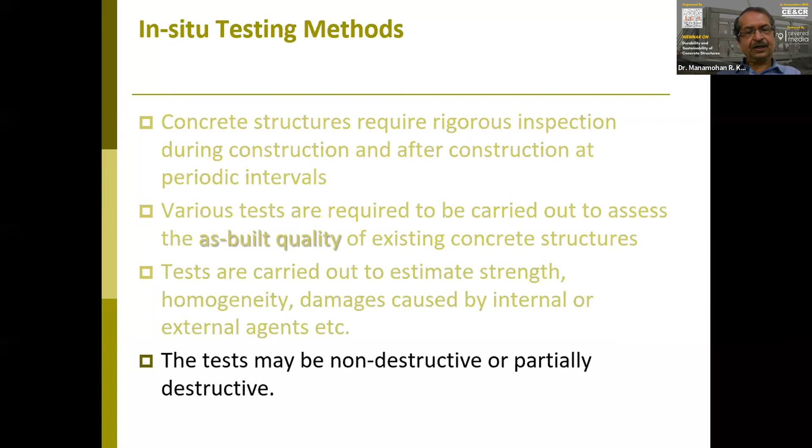Also, you have to use these tests for checking the strength and homogeneity, or damages that might have been caused over a period of time due to internal or external agents. A number of equipments, technologies, and methods are available, which might be non-destructive or partially destructive. I'm not getting into all the details of those tests, but durability is a function of manufacture. That is, how do you manufacture the concrete? How do you place the concrete? How do you cure the concrete? How do you maintain the concrete? All of these become very important to ensure durability.

One small question is the use of alternate materials. Is that an issue with concrete using alternate materials? Is durability getting affected by this? So the answer is yes and no. Now, why we say yes and no, let's look at why yes. The problem is that we have less understanding of the properties of alternate materials. We have less control on the properties and quality of the alternate materials. We have lesser understanding of the impact of alternate materials.

And consequently, we may face undesirable interactions with other ingredients, altered fresh concrete behaviors like reduced workability, excessive bleeding, reduced slump retention, excessive shrinkage cracks, etc., when we use a particular type of alternate material, or altered or impaired hardened concrete behavior. All of this could be a consequence of us not knowing fully well what these properties are. I said characterization is very important. Although we do the characterization, the study of concrete, the study on durability, still there could be interactions which we might not have understood or which escaped our attention, and we might end up with these consequences. So we may have increased permeability, reduced strength, delayed ettringite formation, etc.

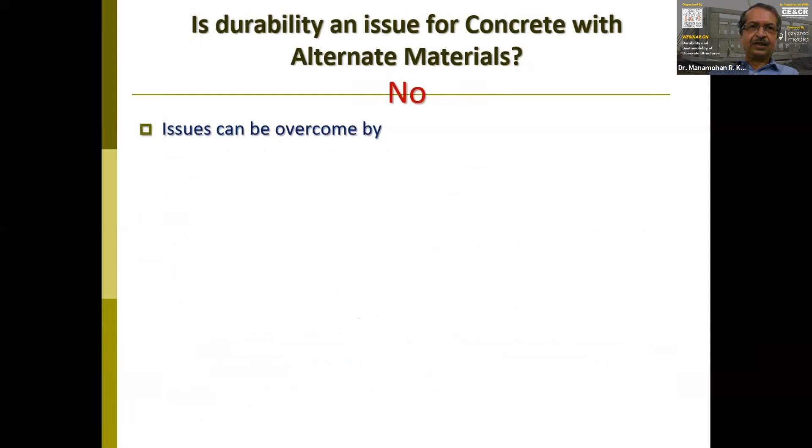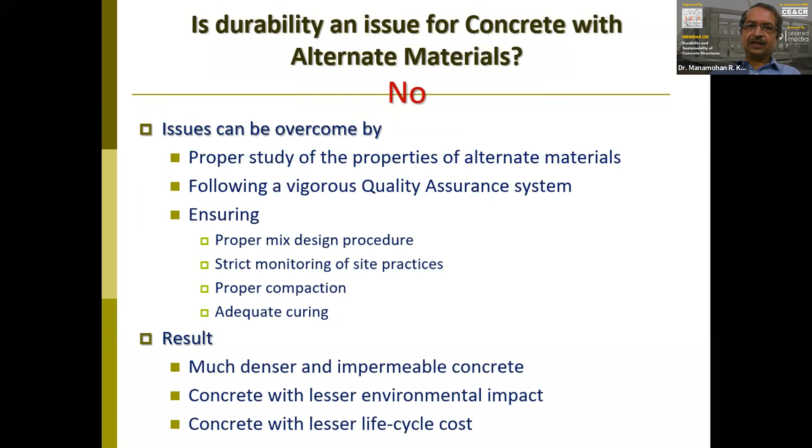Now, if I want to say no to the same question, what are the answers? That the issues in the previous slide can be overcome by proper study of the properties of alternate materials, following a rigorous quality assurance system, ensuring a proper mix design procedure, strict monitoring of site practices, proper compaction, adequate curing, etc., resulting in much denser and impermeable concrete with lesser environmental impact, and also concrete with lesser life cycle cost.

So in conclusion, I would like to say that construction industry has a large role to play in sustainable development, and the drive towards more sustainable construction is achievable only when all stakeholders in the industry, including developers, designers, builders, and suppliers, as well as owners, which I think is missing here, recognize and appreciate its importance. Because if the owners don't realize the need to follow these sustainable construction practices, they might become an impediment with all other stakeholders being in line, which itself is a little difficult to achieve yet.

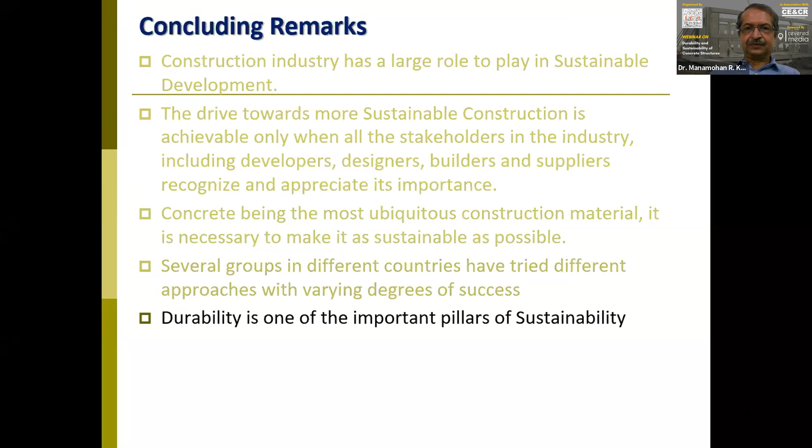Concrete being the most ubiquitous construction material, it is necessary to make it as sustainable as possible, which of course is the basis of this entire presentation. Several groups in several countries have tried different approaches, are trying different approaches with varying degrees of success, which is good news for us. And durability is one of the most important pillars of sustainability, and design for durability, followed by selection of proper materials and their combination, supported by systematic QA/QC procedures, can ensure durable and hence sustainable concrete.